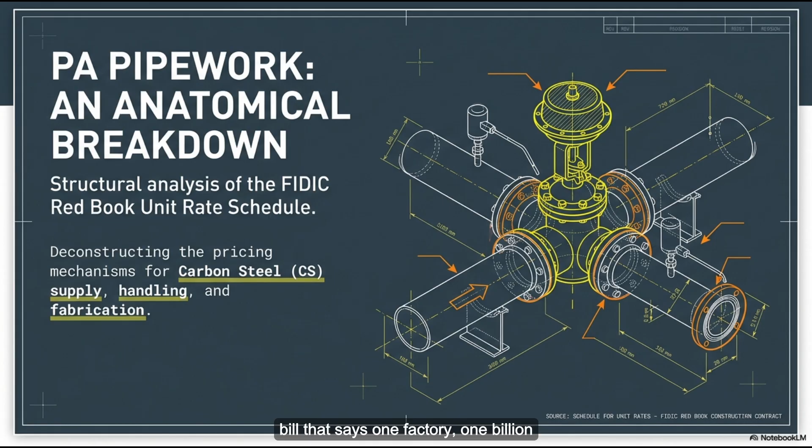Yes. And that is exactly what we are unpacking today. Because I've always wondered about that. Do you just get one giant receipt at the end of the project? Does the builder just hand the client a bill that says, one factory, $1 billion, please pay by Tuesday? Oh, man. If you did that, you would be in court for the next 20 years. The financial arguments would literally never end.

So to figure out how this actually works in the real world, we are doing a deep dive into the financial DNA of a mega project. We've got our hands on two very dense, very specific documents from a standard FIDIC Red Book construction contract. Right, which is essentially the international Bible for construction contracts. Yeah. If you're building something huge in Europe, the Middle East, or Asia, you are very likely using FIDIC rules.

Exactly. So we have one document called Unit Rates for Construction Preambles, which basically acts as the rule book. And then we have the raw data, which is a unit rate schedule specifically for piping. And our mission today is to decode how billions of dollars are managed through these tiny little line items. And we aren't just looking at prices here, which is the fascinating part. We are looking at the definitions that prevent total chaos on a job site. Because, as we'll see, the price of a pipe isn't just the price of a pipe. It's actually a mechanism for transferring risk.

Okay, let's unpack this. Because the first thing that really jumped out at me in these preambles is this concept of the measured work composite rate. Yes, that is the core philosophy of the whole system. In the general preambles, specifically clause 1.5, it talks about this rate, and it uses this phrase over and over again, fully inclusive. That phrase, fully inclusive, is probably the most dangerous phrase in the entire contract if you are a contractor. Really? Why is that? Because it sounds pretty standard to me. You pay for what you get.

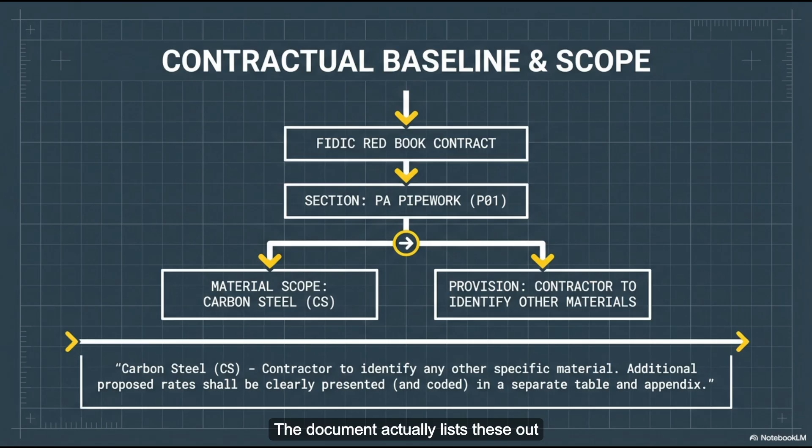Because fully inclusive means the rate you quote for a specific task, say, installing a steel beam, must cover absolutely everything required to make that happen, except the steel itself, if the client is providing it. The document actually lists these out explicitly. It says the rate isn't just the cost of a brick or a pipe. It covers, and I'm quoting here, overhead, profit, small tools, supervision, insurance, taxes, and even cleaning and clearing up.

Right, so think about that practically. You are a contractor. Yeah. You look at the spreadsheet, you see a line item that says, install steel beam. And let's say you quote $100 for that. A novice looks at that and thinks, okay, the welder costs $50, so I make $50 profit. But you're saying it pays for way more than just the welder.

It has to pay for the site office where the welder eats his lunch. It has to pay for the electricity running that office. It has to pay for the foreman shouting instructions. It has to pay for the guys sweeping up the metal shavings afterwards. So if the contractor forgets to factor in the cost of the broom, they are buying that broom out of their own pocket, and the preambles are ruthless about this. Clause 1.5b explicitly says the employer will not reimburse for lost overheads due to omitted scope. Wow, so it's basically a speak now or forever hold your peace situation. Exactly. You build the risk into the rate.

If you underestimate the cost of cleaning up or the cost of insurance or the cost of your own headquarters, you don't get to ask for more money later. The client has transferred that risk entirely to you right off the bat.

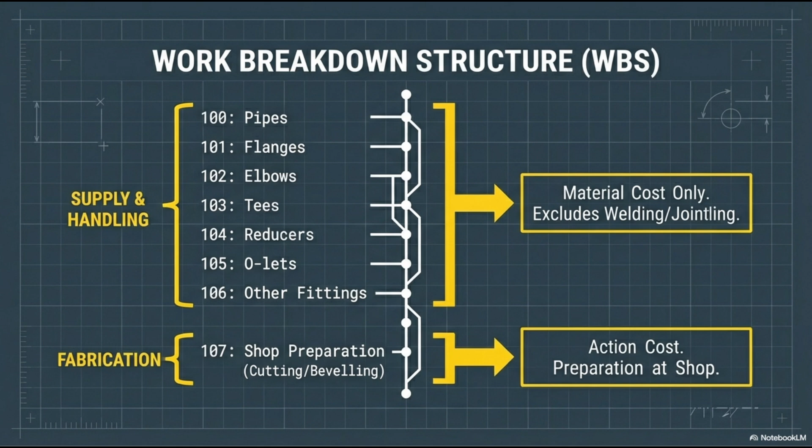That makes total sense. Now, I want to look at the definitions of action because this is where the rubber really meets the road. The document defines three main stages: supply, fabricate, and erect. And the distinctions between those three are critical. Let's start with supply. Clause 1.2.a. It's not just buying the material. It includes wastage factors, inspection, packing, and even quarantine facilities.

That wastage factor is huge. Let's say you need to install 100 meters of pipe. You can't just buy exactly 100 meters. Why not? Because you're going to cut the ends off to bevel them. You might drop a piece and dent it. You might find a defect from the manufacturer, so you actually need to buy, say, 105 meters to get 100 meters of finished installed work.

But the client only pays for the 100 meters. Correct. The client pays for the net installed amount. The cost of that extra 5 meters, you better have hidden that inside your supply rate. If you didn't, you are literally giving away pipe for free. That is wild. Then we have fabricate. This includes shop drawings, cutting, and handling. And finally, erect or install.

This one fascinated me. It includes trial fitting. Oh, trial fitting is a massive hidden cost that catches people out. What does that actually look like on a real site? Well, imagine you have a massive piece of equipment or a complex spool of pipe that needs to fit into a really tight space 50 feet in the air. You don't just rig it up there and hope for the best. Right, it'd look pretty silly if it got up there and didn't fit.

Exactly. So often, you will assemble the whole thing on the ground. First, you trial fit it just to make sure all the bolt holes align. Then, you take it all apart. Then you rig it up. Then you lift it. Then you build it again in the air. And you only get paid for the final installation? That is right. The rate for install has to cover that entire dance. The trial, the dismantling, and the final build. If you quoted the job thinking you just had to bolt it together once, you are going to lose your shirt on labor costs.

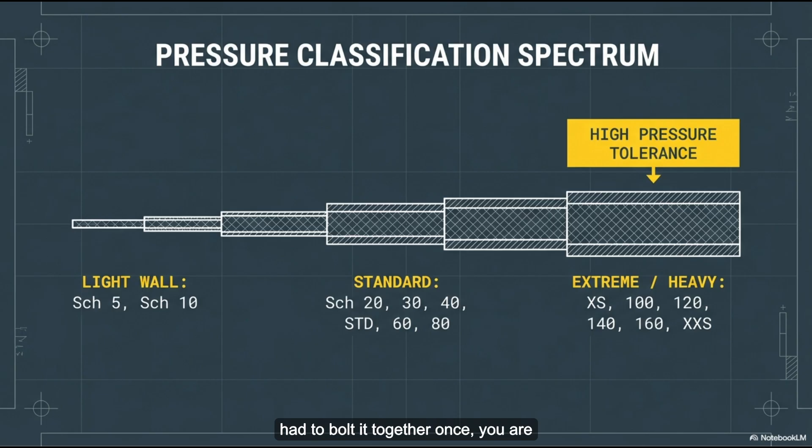So the aha moment here for me is that when you see a price for, say, install valve, it effectively includes every single logistical headache required to get that valve from the delivery truck to the pipe, including the bolts, the gaskets, the testing, and the trial run. Precisely. It simplifies the billing for the client tremendously, but it massively complicates the estimation for the contractor.

Now, to keep track of all these millions of parts, the documents lay out a system. Section 2 introduces the work breakdown structure, or WBS. I always like to call this the Dewey Decimal System of Construction. Without it, you would just have a giant pile of metal and a lot of very confused people. It's a 7-level coding system. Let's walk through it because it's actually quite elegant when you look at it. It starts broad and gets incredibly specific.

Level 0 is the asset or facility. Level 1 is the area. For example, code 02 is inside battery limit, which usually means the main processing area. And then level 2 is the component, like a specific unit. Level 3 is the discipline. This is where we see codes like PA for piping, ST for structural, or RW for roadworks.

And then we really dive into the details. Level 4 is material. For piping, we see P01 is carbon steel. Level 5 is the activity, like supply and fabricate. Level 6 is the description, like the schedule or thickness. And finally, level 7 is the specific item size, like 12-inch diameter.

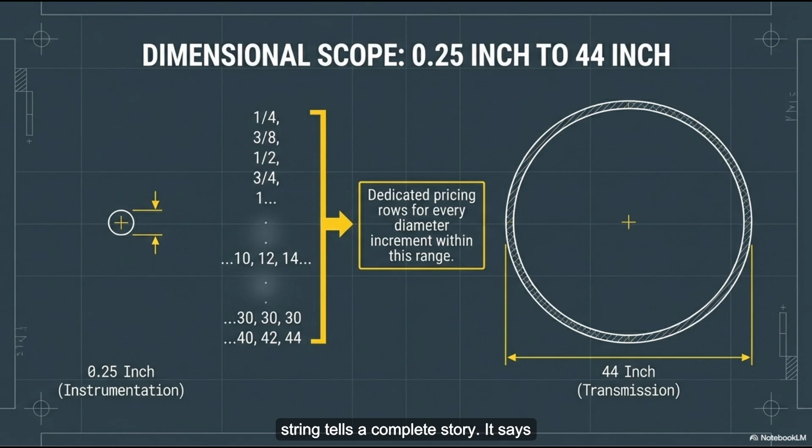You end up with this long code string that looks like 02.1.PA.PA.0.1.0.1.0.014. And to a project manager, that single string tells a complete story. It says, inside the main unit, this is a piping task, using carbon steel, specifically supplying pipes for shop fabrication, schedule 120 thickness, and it is 14 inches wide.

That granularity is mind-blowing to me. Why do they need to be that specific? Why not just have a simple code for pipe? Because the cost and the effort are totally different. Welding a 14-inch pipe takes significantly longer than welding a 6-inch pipe.

Welding carbon steel is entirely different than welding stainless steel. You need a specific bucket for every single dollar to land in. This allows the project manager to track every nut and bolt across a billion-dollar site.

Speaking of pipes, let's jump into the piping data document itself. This thing is so dense, it is just page after page of tables. It represents the sheer volume of options on a site like this. We are seeing schedules, which is just the industry term for wall thickness, ranging from Schedule 5, which is quite thin, all the way up to Schedule XXS, double extra strong. That sounds like a superhero name.

It practically is. These are pipes with incredibly thick walls designed to handle extreme pressure, sometimes thousands of PSI. If that kind of pipe bursts, it isn't a leak. It's an explosion. Now, there is a very specific rule in the preambles about how you measure this pipe to get paid. Clause 3.1 says piping is measured along the center line through all fittings.

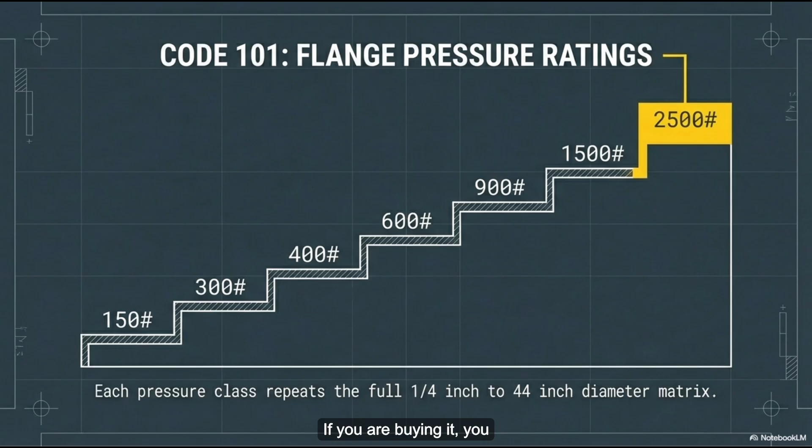This is a classic point of contention in construction. Imagine a pipe going around a corner. The outside of the bend is physically longer than the inside of the bend. So if you are the guy selling the pipe, you obviously want to measure the outside curve. If you are buying it, you want to measure the inside. So the contract acts as the referee here.

Exactly. It steps in and says, stop arguing. We are measuring an imaginary line right down the center, and it says you measure through the fittings. So you run the measurement right through the middle of the elbows and the T's. But not through the valves. No, and that is a key distinction. Valves are enumerated, meaning they are counted one by one. You get paid, say, $500 to install the valve itself. But the pipe, you just run a tape measure down the center line and subtract the valve space.

I noticed a big distinction in the WBS codes between shop and field work. Yes. Code 100 to 119 is usually shop fabrication. Code 120 and up is erection or field work. Why separate them so strictly? A weld is a weld, isn't it? Oh, definitely not. Shop work includes things like cutting, beveling the edges, and welding in a highly controlled environment. You have overhead cranes, you have machines to perfectly rotate the pipe for the welder. It is basically factory work, efficient and safe.

And field work? Field work is out in the elements. It's raining, it's muddy, you might be 50 feet up on a scaffold, hanging upside down, trying to weld a joint in the wind. It is much harder, much slower, and therefore it is much more expensive. The rates have to reflect that reality.

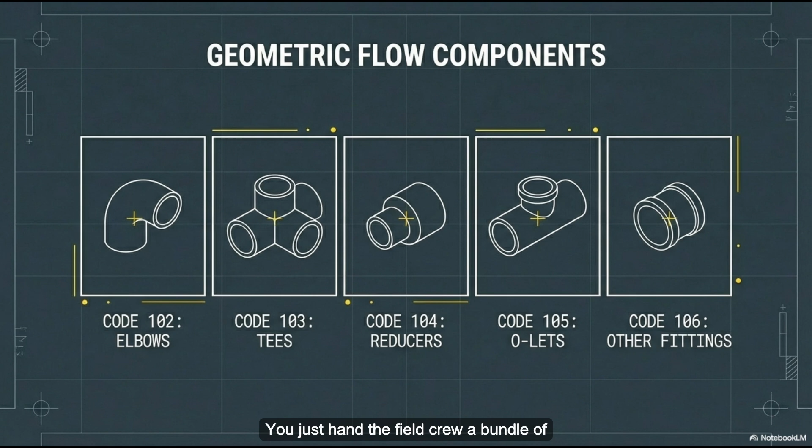There is also a mention of field run pipe in the codes. Those are usually the small pipes, typically under 2 inches. You don't prefabricate those in a shop because they are too fiddly. You just hand the field crew a bundle of straight tubing, and they bend it on site to fit around obstacles, kind of like installing brake lines on a car.

There are some hidden costs buried in these piping rates that really surprise me. For example, testing. Clause 3.1d. This is another massive risk transfer from the client to the contractor. It says the rate for hydro testing, which is filling the pipe with water to check for leaks, is measured once. That is the operative word, once.

So walk me through the nightmare scenario here. Okay, so you are the contractor. You have had a crew working for weeks welding this massive, complex system. You bolt it all up, you fill it with thousands of gallons of clean water, you pressurize it to 1.5 times the operating pressure. Everyone is standing around watching. And then pop. Exactly. A tiny pinhole leak in a single weld. Water sprays out. The test officially fails.

What happens next? You have to drain all that water. You have to grind out the bad weld. You have to re-weld it. You have to fill the entire system up again. And you have to pressure test it again. And who pays for that second test? You do. The contractor. The client pays for one successful test. The cost of all that rework, the water disposal, the delay to the master schedule, that is entirely on you.

That puts a massive premium on quality control. It absolutely does. If your welders are having a bad day, you aren't just losing time, you are hemorrhaging money. Another one that stood out to me was identification. Clause 3.1e.

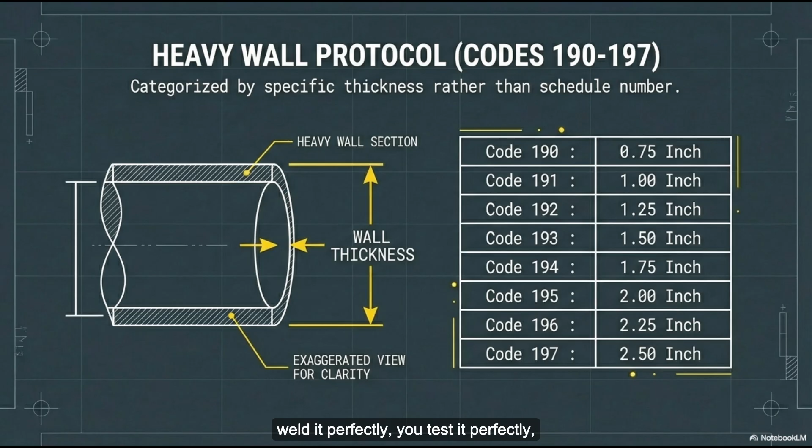Right. A pipe isn't finished until people know what is actually inside it. The rate includes painting color codes, applying flow arrows, and tagging. So if you install the pipe perfectly, you weld it perfectly, you test it perfectly, but you forget to put the little sticker on it showing which way the water flows, you haven't finished the item. You do not get paid. It is that strict.

Piping isn't the only discipline with these quirky rules either. I want to compare this to steel, mechanical, and civil works, because each one seems to have its own unique gotcha built into the preambles. They really do. They all have their own flavor of risk. Let's look at structural steel in Clause 3.3. It is measured in tons. Seems pretty straightforward to me. Weight is weight. You would think so. But look closer at the wording. It is measured net as fixed. And it specifically says no allowance is made for rolling margin or the weight of the weld metal.

Rolling margin. What exactly is that? When steel comes from the manufacturing mill, it has a tolerance. A steel beam might technically be listed in the catalog as 100 kilograms per meter, but maybe the steel rollers at the factory were a bit worn down that day, so the beam comes out slightly thicker. It might actually weigh 102 kilograms. So the contractor buys the steel from the mill by actual weight. They pay for 102 kilograms, but the client pays them based on the theoretical 100 kilograms. The contractor eats the difference.

And the weld metal. You're adding molten metal to join these huge beams together that adds actual weight to the structure. You don't get paid for that either. It is deemed included in the rate per ton.

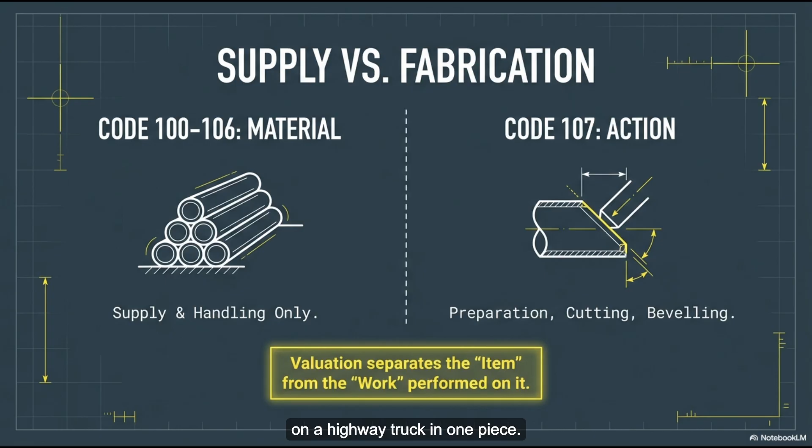Let's move over to mechanical equipment. Clause 3.2. There was a specific note about reassembly. This happens all the time with big machinery. Let's say you were installing a massive crane or a huge gas compressor. It is simply too big to ship on a highway truck in one piece. So the manufacturer takes it apart, they remove the handrails, the platforms, maybe they even split the main casing. So it basically arrives on site like a giant IKEA kit. Exactly. And when it arrives, the contractor has to put it all back together.

The rate for install equipment automatically includes that reassembly. If you quoted a price thinking you just had to lift one big box off a truck and bolt it down, you are in for a rude awakening when you open a crate and see 1,000 loose parts. And shims and grout are included in that too. Yes. You never just bolt a heavy machine directly to uneven concrete. You have to level it perfectly using little metal plates called shims, and then you pour a special concrete called grout underneath to lock it all in place. The preamble says all of that labor and material is included in the one-line item.

Okay, let's talk about civil works. Clause 3.7, excavation. The digging of holes. Right. It is measured by net volume. But the rate must include upholding sides of excavation. This is a huge safety issue and a massive cost issue. If you dig a deep hole, the dirt naturally wants to fall back in. It wants to collapse, so you have to shore it up. You put up wood or steel supports to keep the walls vertical so people can work down there safely. And the preamble is saying that cost is already supposed to be in the rate.

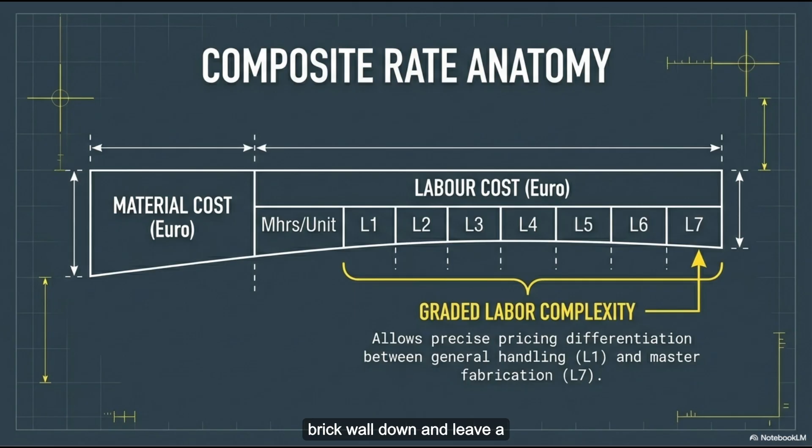Correct. So if you are digging in loose, sandy soil, you might actually spend more money on the shoring than on the actual digging itself. If you didn't check the soil report before you bid the unit rate, you are in serious trouble. And what about demolition? That includes disposal off-site. You can't just knock a brick wall down and leave a rubble pile for the client. You have to make the debris disappear entirely.

It just seems like every single discipline has these hidden tasks that are absolutely essential but not obvious in the line item name. That is the whole nature of the composite rate. It forces the builder to think about the entire process from start to finish, not just the raw material.

Let's touch on the nervous system of the plant, electrical and instrumentation. Clause 3.6. This is where things get really, really granular. Cables are measured net, meaning the actual installed length, but there is a snaking factor mentioned. Clause 3.6e, you never pull a cable perfectly tight like a guitar string. Why not?

Because buildings physically move. Pipes expand with heat. If the cable is pulled tight, it will snap under tension. It needs a little slack, a little snake in the tray. So the contractor has to estimate that slack.

Yes. The client measures the distance on the drawing. They say point A to point B is exactly 100 meters. The contractor knows they will actually buy and install 102 meters to account for the snaking. Their price per meter needs to be slightly higher to cover that invisible extra length.

And then there is glanding and terminating. A cable is completely useless unless it connects to something. Glanding is securing the cable entry into a junction box so it is waterproof. Terminating is stripping the wires and physically connecting them to the terminals. Clause 3.6-H makes it clear this is a separate cost from the cable itself.

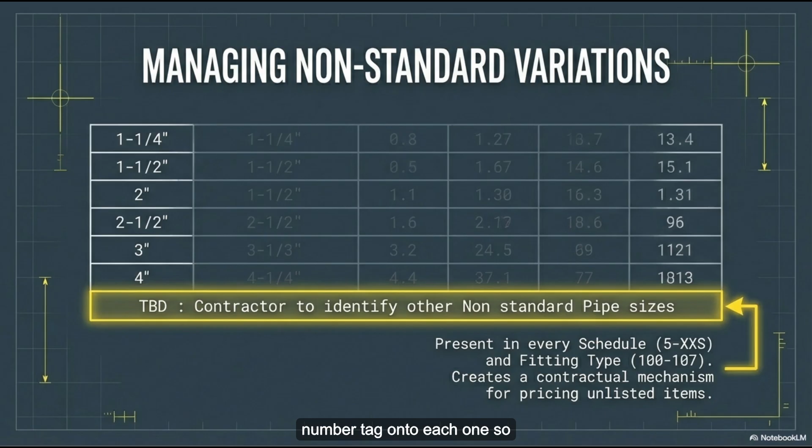Usually, yes. But here's where it gets tedious. It includes marking the tails. Marking the tails, what does that mean? Imagine a thick control cable. It might have 50 tiny copper wires inside it. You have to strip every single one, and you have to slide a little plastic number tag onto each one so the electrician knows exactly which wire does what.

That sounds incredibly tedious. It takes hours. And if you don't do it, the control system doesn't work. The rate for terminating has to cover the guy standing there with a pair of tweezers putting the number 42 on a tiny wire. The WBS codes here go deep, too.

I saw codes distinguishing between a 3-core 2.5 millimeter cable versus a 12-core cable. It matters massively. Terminating a 3-core cable takes 10 minutes. Terminating a 50-core cable takes half a day. You need a completely different rate for each, or you will lose a fortune on the complex ones.

So what does this all mean for us? We have looked at the pipes, the steel, the wires. We have seen the trap of the fully inclusive rate. But stepping back from the details, you realize that the unit rate is way more than just a number on a spreadsheet. It is a fundamental risk management tool.

How so? By defining fully inclusive so rigorously in these preambles, the client is transferring the risk of efficiency directly to the contractor. They are saying, I don't care how many times you have to retest the pipe, or how much slack you need in the cable, or how many broom heads you wear out cleaning up. I'm paying you X amount for the finished working product.

It really forces the contractor to be professional. They have to think about every single step, from the quarantine of materials when they first arrive to the final flow arrow sticker on a pipe before they even bid on the job. Exactly. And honestly, without these preambles, a construction site would be a constant, never-ending argument. The contractor would say, hey, you didn't pay me for the scaffolding. And the client would say, well, you couldn't install the pipe without it, so it should be free.

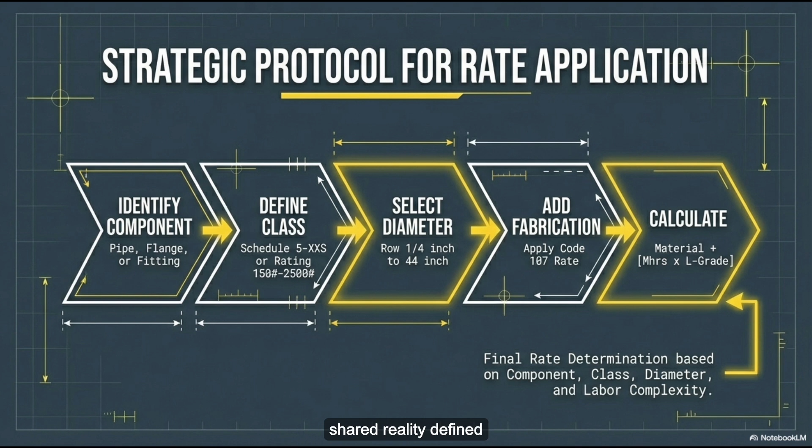It creates a shared reality between the person paying and the person building. That is the perfect way to put it. A shared reality defined by WBS codes. It is rigid, it is strict, but it is the only way to build something worth $1 billion without the whole thing collapsing into a massive legal battle.

So, to wrap this up, the next time you drive past a new building, or a massive factory, or even look at the plumbing under your own sink, think about the millions of WBS codes hidden inside those walls. Think about the fully inclusive rate. If a pipe leaks during testing, or a hole collapses while they are digging, remember that the cost of fixing it was theoretically decided months ago in a single line item on a PDF, just like the one we read today. It really makes you want to look at the fine print in your own life.

Think about the preambles of the contracts we sign every day. When you hire someone to fix your roof, is cleaning up the nails from the lawn included in the rate, or is that going to cost you extra? Something to explore the next time you sign on the dotted line. Always check your preambles. That is all for our deep dive into the financial DNA of construction.